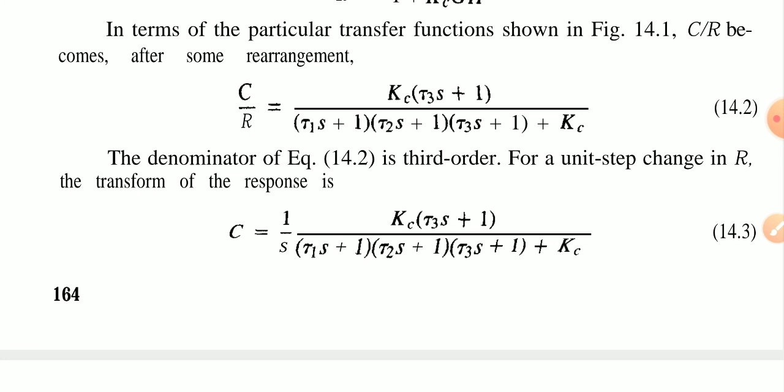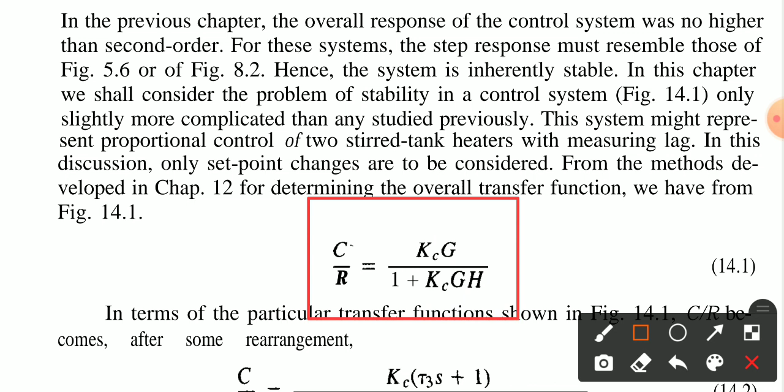The system is inherently stable. In this chapter we shall consider the problem of stability in a control system only slightly more complicated than any studied previously. This system might represent the proportional control of two stirred tanks.

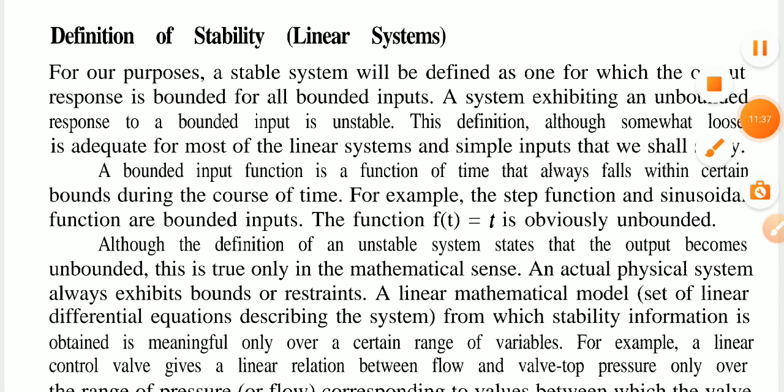For our purpose, a stable system will be defined as one for which the output response is bounded for all bounded inputs. A system exhibiting an unbounded response to a bounded input is unstable. And this definition, although somewhat loose, is adequate for most of the linear systems and simple inputs that we shall study.

A bounded input function is a function of time that always falls within certain bounds during the course of time. For example, the step function and sinusoidal functions, which we saw for bounded input.

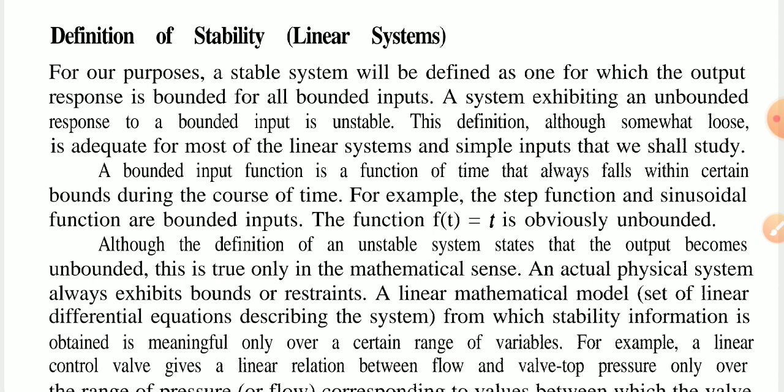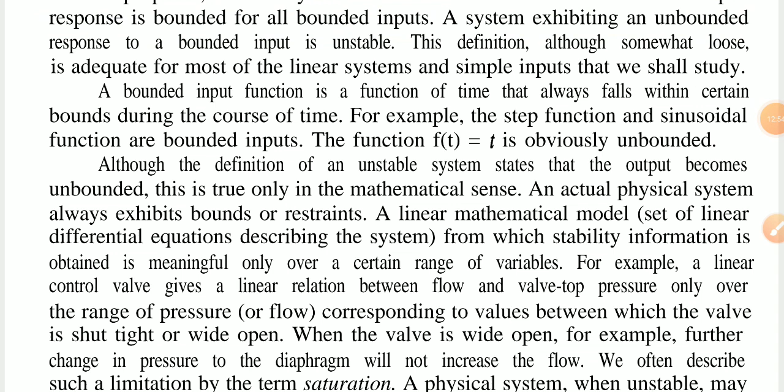Okay, so the main definition part is there. Although the definition of unstable system states that the output becomes unbounded, this is true only in the mathematical sense. Actual physical systems always have bounds or restraints. Linear mathematical models, a set of linear differential equations describing the system from which stability information is obtained, are meaningful only over a certain range of variables.

For example, a linear control valve gives a linear relation between flow and valve top pressure only over the range of pressure or flow corresponding to the values between which the valve is shut tight or wide open. When the valve is wide open, further change in the pressure to the diaphragm will not increase the flow. We often describe such a limitation by the term saturation.

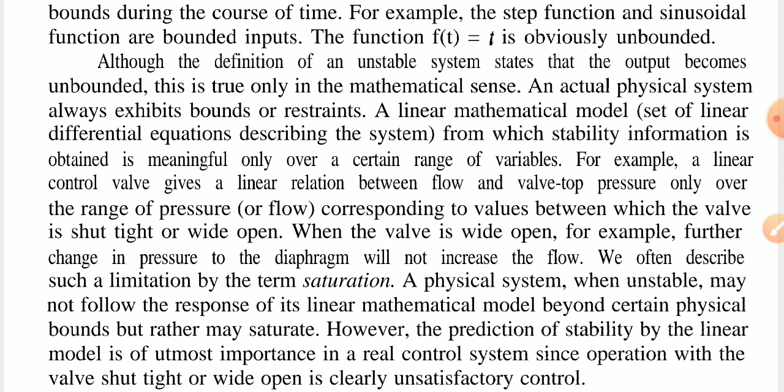Okay, a physical system when unstable may not follow the response of the linear mathematical model beyond a certain physical limit, but rather may saturate. However, the prediction of stability by the linear model is of the utmost importance in a real control system, since operation with the valve shut tight or wide open is clearly unsatisfactory control.

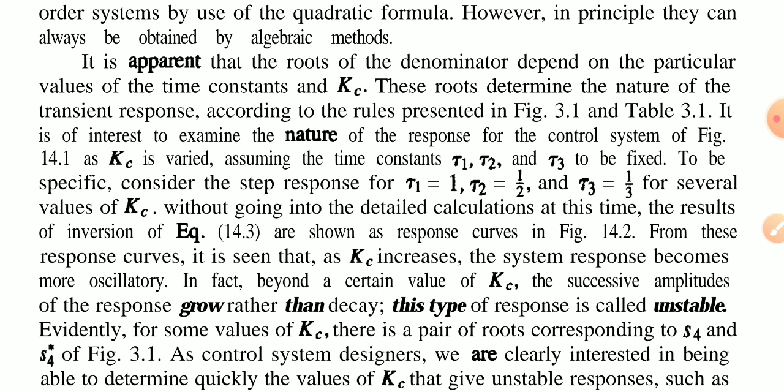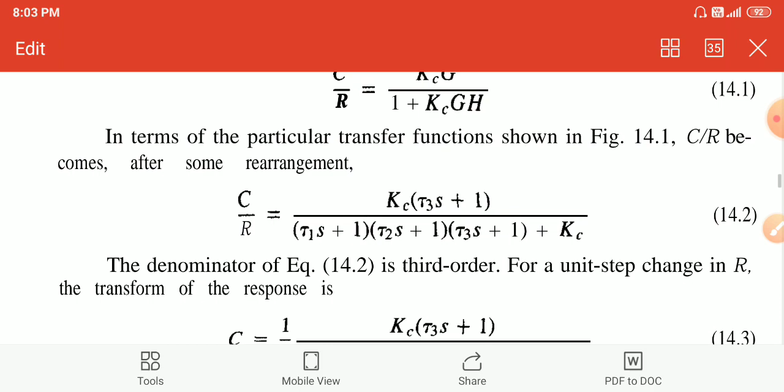Okay, 14.2 third order equations. C by R is equal to Kc(T3s + 1) divided by (T1s + 1)(T2s + 1)(T3s + 1) + Kc.